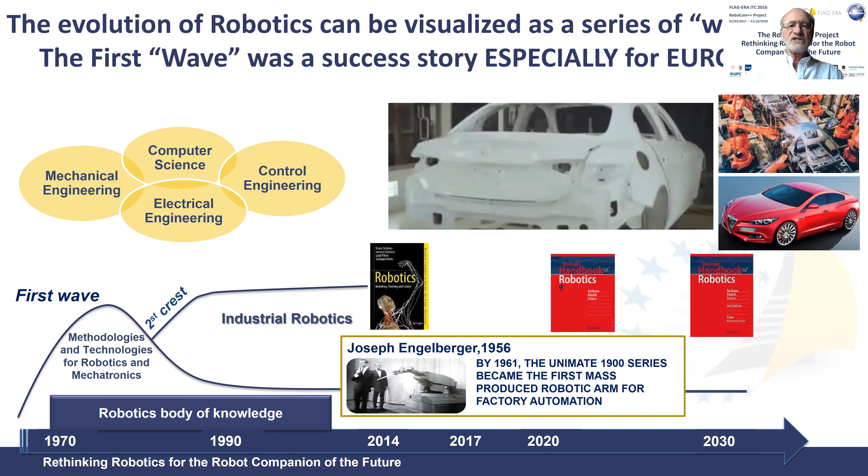The second wave of robotics was about what you can call the consolidation of industrial robotics, but also the rise of service robotics. New ideas, new technologies, for example advanced mechatronic solutions, the Internet of Things, and software, so artificial intelligence, machine learning, were introduced. Europe was a leader in this field, but of course there were also many competitors or colleagues who also developed this. And today this is a market that is quite well consolidated.

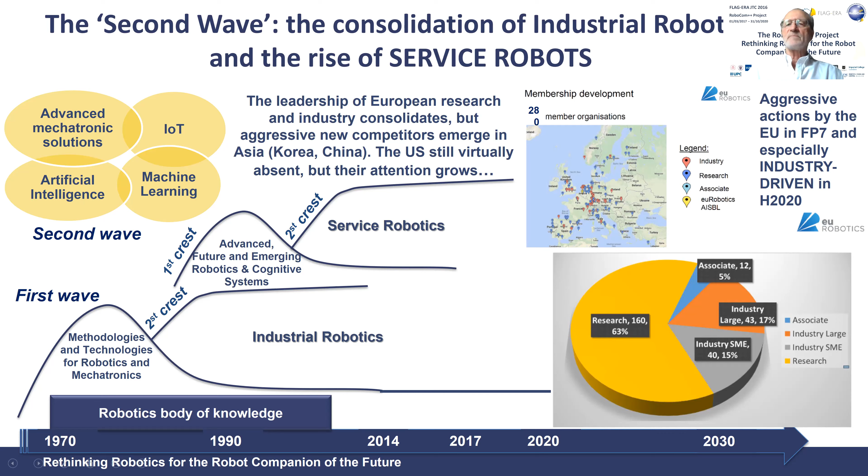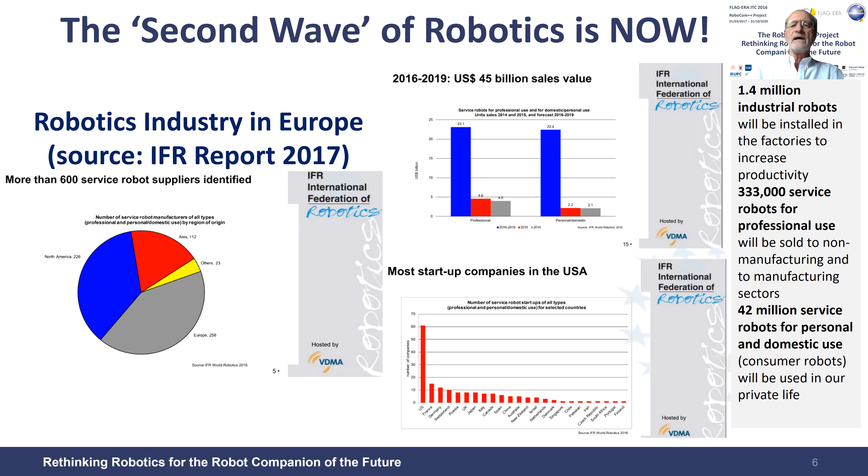In fact, if you look at these figures, it's quite impressive how service robots have established. I would just mention surgical robotics, but I could add vacuum cleaners and robots for extreme applications such as underwater or in space exploration. So this is also a very successful area now, and it is for robotics industry in Europe, but also in the USA, in China, Japan, Korea, and worldwide, and growing according to the forecast of the International Federation of Robotics. This field will explode in the near future too.

But there is something that goes after that, and it is very important to create the know-how, the knowledge that would allow robotics to explore and to fully take advantage of what will be the future scenario for what we call the third wave, that will be based on new knowledge, not only the mechatronic platform, but for example topics like morphological computation, the idea of simplification, self-organization, more and more energy issues, bionics and bioinspiration, the explosion of new materials, cognitive science, and of course the total connection to the web.

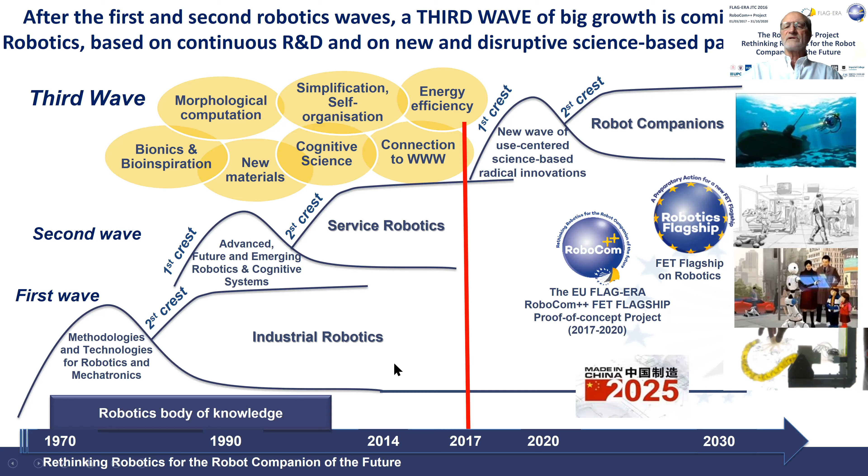And there are many projects that have been developed on robot companions and essentially on science-based radical innovations, involving big initiatives like, for example in Europe, Flagship, but in China also the 2025 program, and so on.

And you can also consider, in the framework of the idea of science-based robotics, the very successful initiative, the new journal Science Robotics, that has got a major impact factor very quickly, showing that robotics for science, or science for robotics, is a very solid statement.

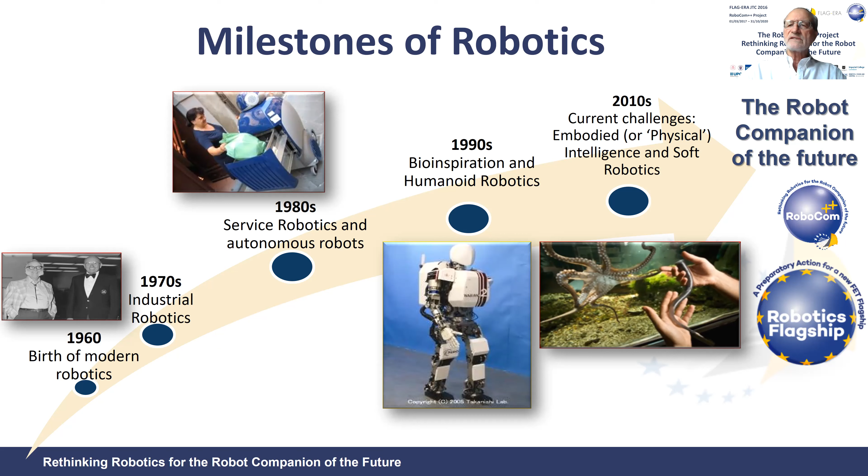So the milestones of robotics are shown here, very synthetically. Overall, we start from the birth of modern robotics in the 1960s, to the growth of industrial robotics, to service robotics and autonomous robots, to bio-inspired humanoid robotics, to current challenges like embodied intelligence. So not only artificial intelligence, let's say in the brain, but also intelligence in the body. All leading toward the concept of robots for all, robots that will be our companions in the future.

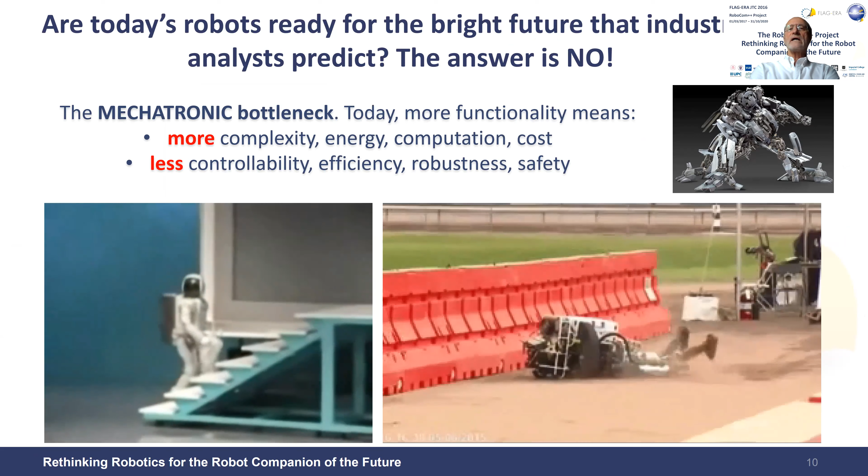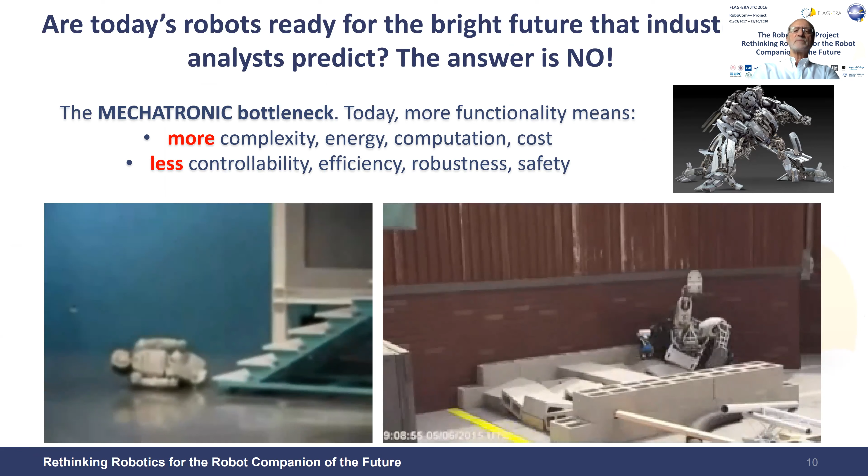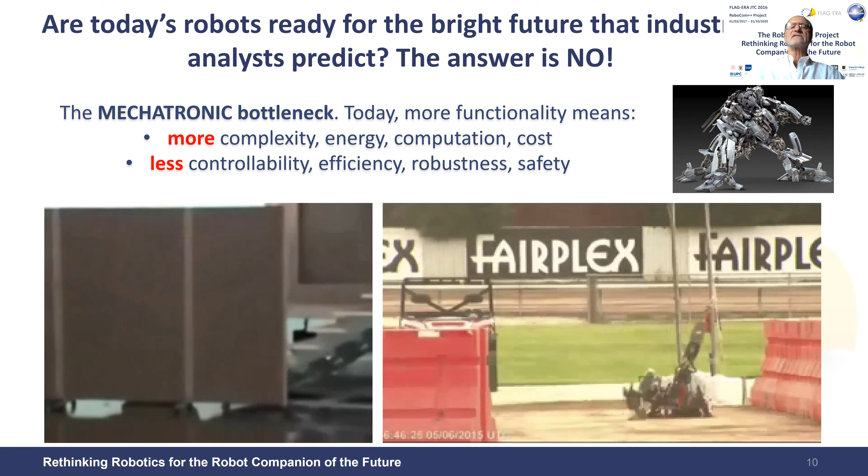Are today's robots ready for this future? And the answer is no. Those are, for example, very friendly demonstrations of the limitations of our current robots, because if we want to achieve more complexity, essentially we are going to have less controllability, less efficiency, less robustness, and ultimately lower safety.

So it's important to do something radical. This is our idea: of course mechatronic platforms will develop smoothly, but we want to explore and to go beyond the frontiers of the current incremental mechatronic approach. So, for example, looking at a cat, it's impressive how just a simple cat can have behavior that I define as graceful behavior, that is by far really beyond our capability.

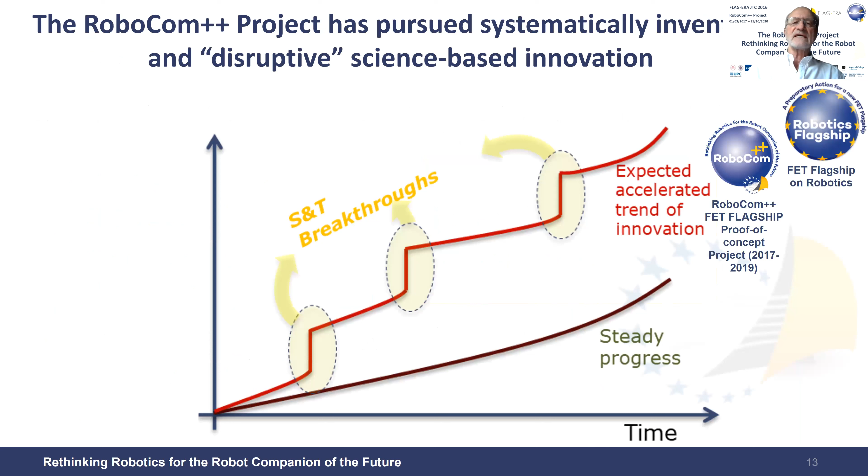So the idea to follow the third wave of robotics is really studying natural organisms and what they can do - simplification mechanisms, not complexity, but rather simplification, the use of new materials, new fabrication technologies, the exploitation of new energy forms - is what we want to pursue. And this is exactly what the Flagship RoboCom++ project was aiming at. The scientific and technological challenges and objectives were very ambitious, and I just wish to share with you the strategy.

The strategy is this: of course we have here an incremental progress of any technology. We can talk about robotics technology as a steady progress, and certainly we want to do that. But at the same time, we would like to take advantage of what could be breakthroughs, disruptive innovation that make quantum leaps in scientific and technology advancement. This could lead to an acceleration in innovation.

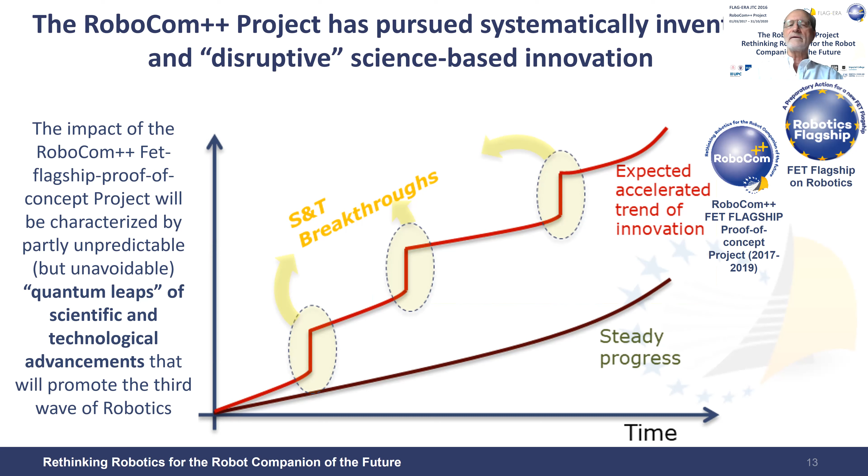How to do that, of course, is not easy, but the idea is to identify what could be the breakthroughs and to facilitate the implementation of such radical innovation by creating a favorable ecosystem in robotics research and also industrial development.

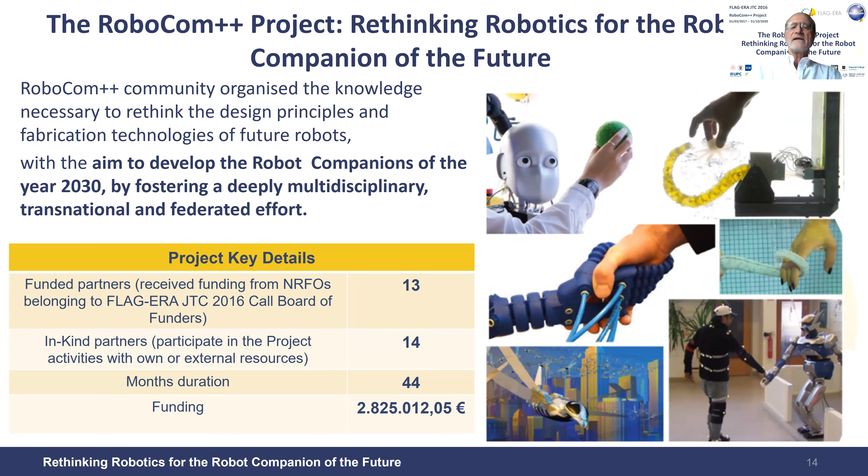Based on this vision, the RoboCom project was organized and funded by the Flagship initiatives and co-funded by participating countries. There are a total of 27 partners with funding in the range of 3 million euros. I think it's a beautiful example of what Europe can do in this framework. Actually, if you look at it, it's really unique in the world.

There are partners from virtually all over Europe and also from Turkey, Israel, and Switzerland. So strictly speaking, not all countries belong to the European Union, but they participate together as a consortium to pursue the vision and achieve the results I have outlined, because only a variety and diversity of knowledge and culture can lead to this ambitious goal. It is very difficult for a single country to do that, because this is a deeply interdisciplinary, and in fact transdisciplinary, effort. So what are the ambitious objectives of the RoboCom project?

The goal is to explore different aspects, not all of them because of the limitations of funding and time, but to explore the frontier of the robot of the future that will be able to effectively negotiate natural environments, better interact with human beings, and provide services and support in a variety of real-world and real-life activities, ultimately leading to a new wave of economic growth in Europe, and globally, by boosting the deployment of ubiquitous robots and web-based robotics services.

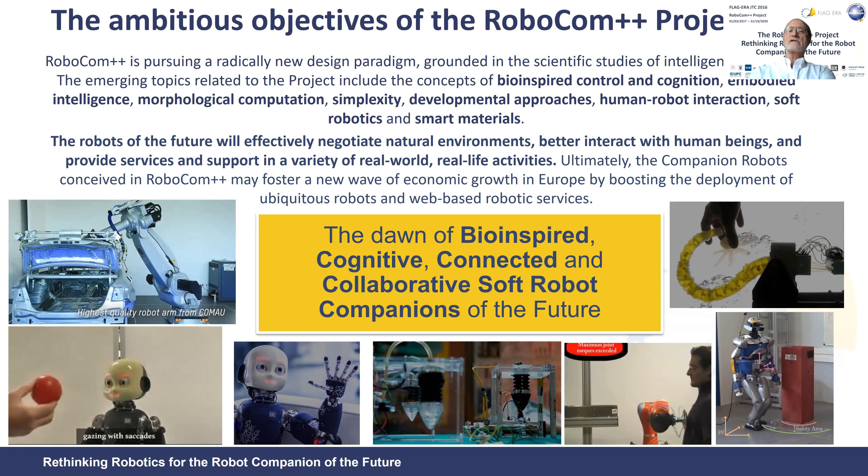To do that, we have explored and encouraged the dawn of bio-inspired, cognitive, connected, and collaborative soft robot companions of the future. The unified vision is shown here. We really want to work on science-grounded robotics to investigate, shown in yellow, the main representative objectives in Robot Companion, developing new engineering and new science, and deploying applications like a worker companion, a robot housekeeper, and a robot rescuer.

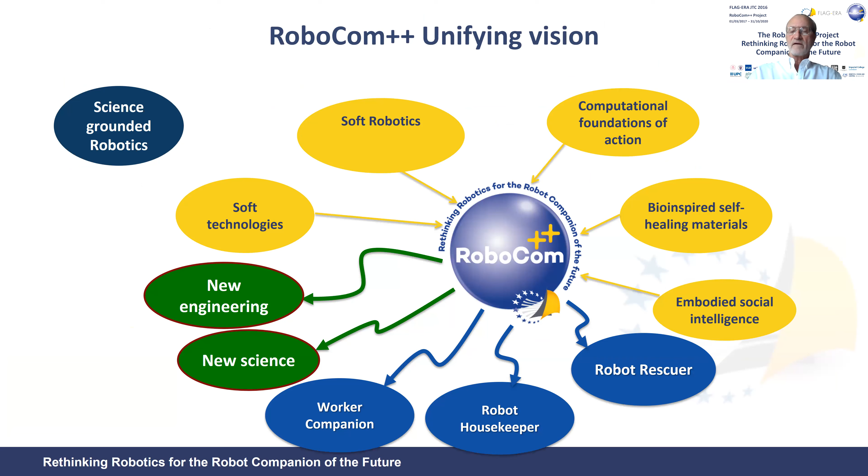We organized 47 community members who participated directly and indirectly in 7 working groups, with the goal of defining the roadmap for a future global interdisciplinary research program on robotics, but also enlarging the community beyond the border of robotics—for example, into biology, neuroscience, material science, energy, social science, and all engineering aspects. Those are just a few examples of the working groups.

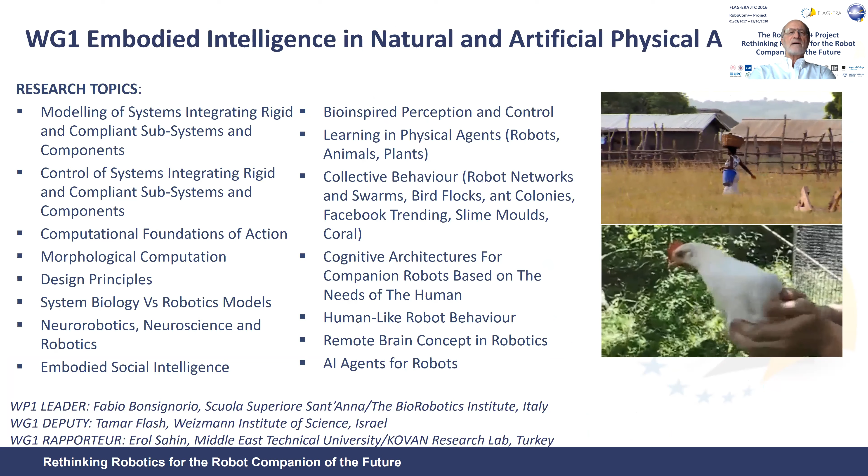The first working group is about embodied intelligence in natural and artificial physical agents. We have identified a number of research topics ranging from computational foundations of action to cognitive architecture, to AI agents for robots, and many other research topics shown here.

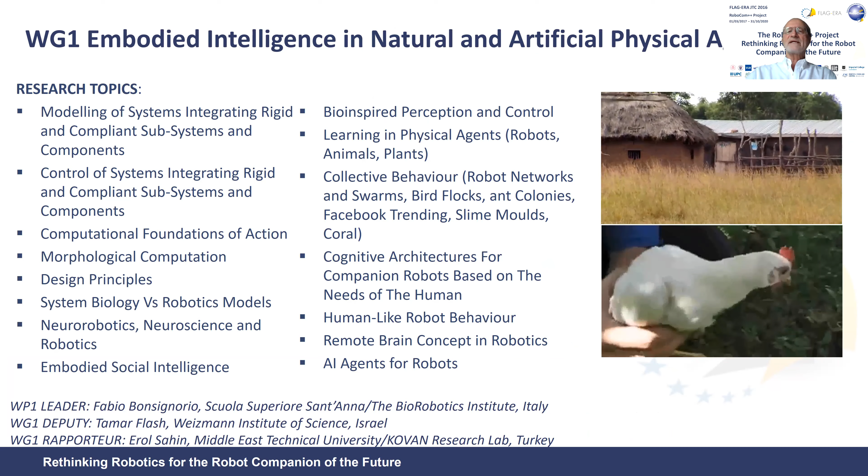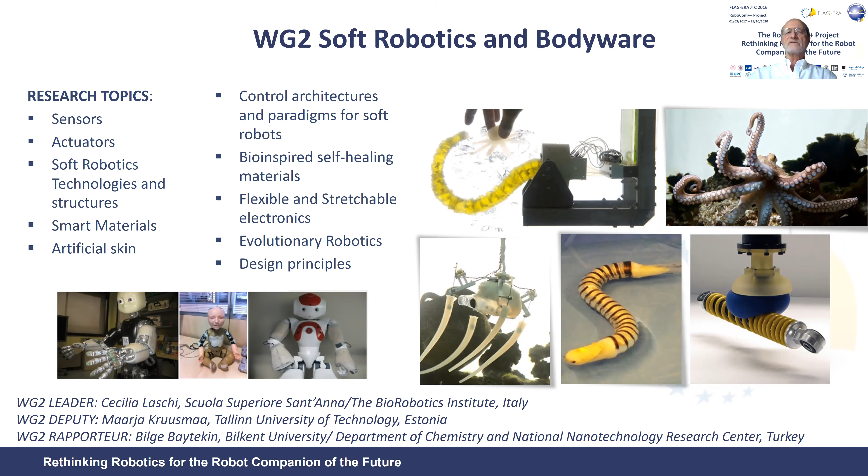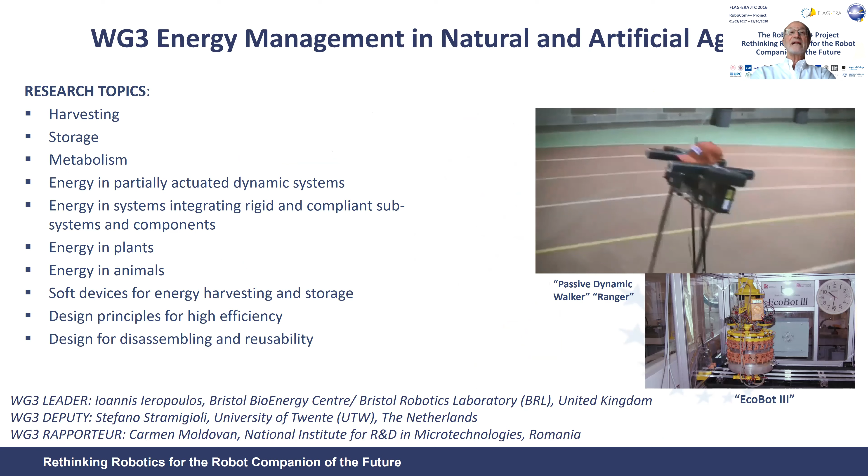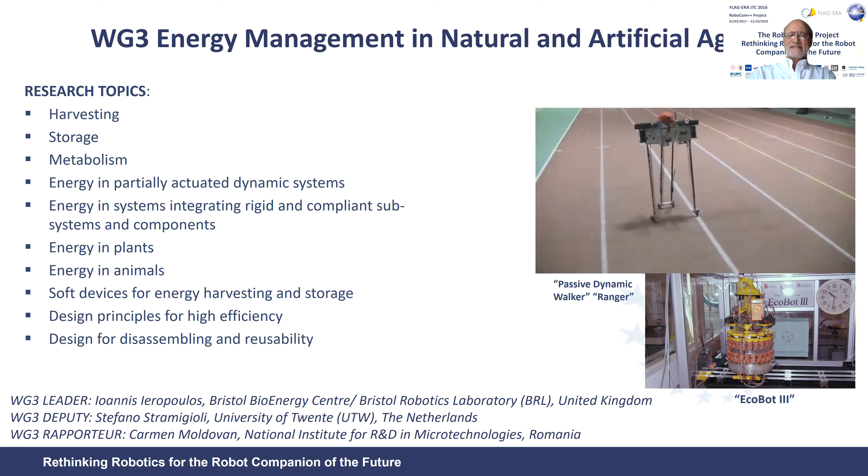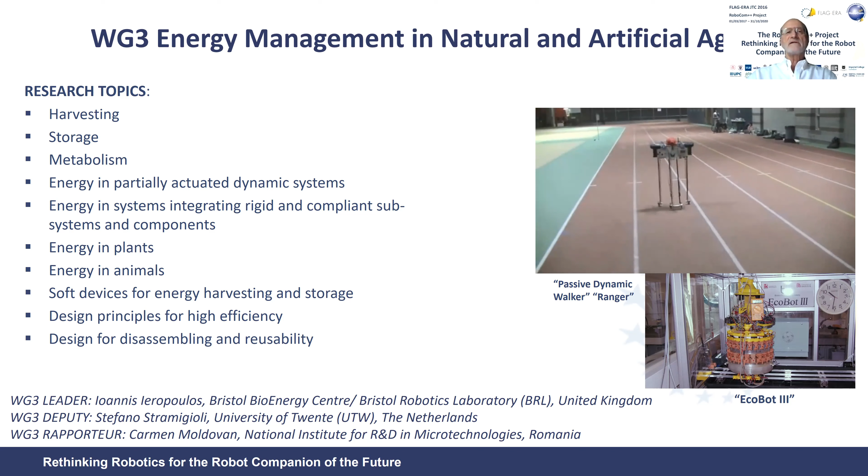A key issue was energy management in natural and artificial agents. This is really important and underestimated, in fact underinvestigated by current robotics. It's a sort of niche topic, but it's becoming very crucial in a more and more energy-concerned world. Harvesting energy, storage, metabolism, design principles for high efficiency, and design for disassembling and reusability are among the topics for this working group.

Another working group was about embodied cooperative and communication processes. The topics we investigated include communication, human-robot interaction, haptic feedback, shared control, collective behaviors, and topics like that—and then the impact on robotic system technology.

What could be the applications of this new knowledge—for example, in wearable robots, prosthetics, medical robots, but literally everywhere, including marine robots, space robots, humanoid robots, aerial and flying robots, cloud robotics, and so on.

Last but not least is the ethical, legal, societal, and economic issues. This is crucial for true acceptability and deployment. The research topics include society, economy, ethics, equal opportunities, education, and sustainability. Taking care of these topics is a fundamental contribution that European culture and European researchers can bring to robotics worldwide, and we want to do that.

Working group 7 is about science platform tools, because the overarching idea of RoboCom++ is about openness.

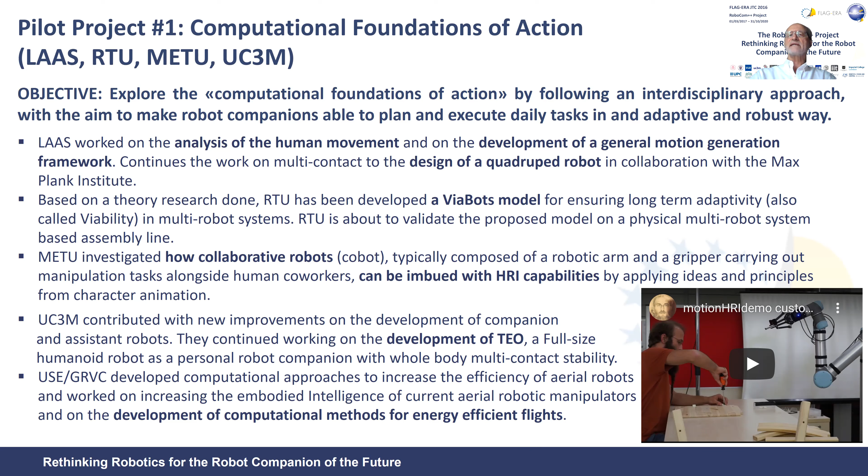Based on these work groups, we have implemented a number of activities and achieved some significant results. For example, pilot project one was implemented about the computational foundations of actions. This will be described by my colleagues in the following videos, but it's about exploring the computational foundations of actions by following an interdisciplinary approach, with the aim to make robot companions able to plan and execute daily tasks in an adaptive and robust way.

Another pilot project is about evolutionary approaches for soft robots exploiting morphological computation. The idea is to demonstrate that computational processes inspired by natural evolution can be used to design effective and adaptive robot bodies and brains for complex tasks and environments.

One important tool to do that was using innovative technologies for building the robot bodies, like 3D printing, but also 4D printing, in which the printed structure can evolve as a function of time and exhibit intelligent behavior due to the interaction between stimulus and smart materials.

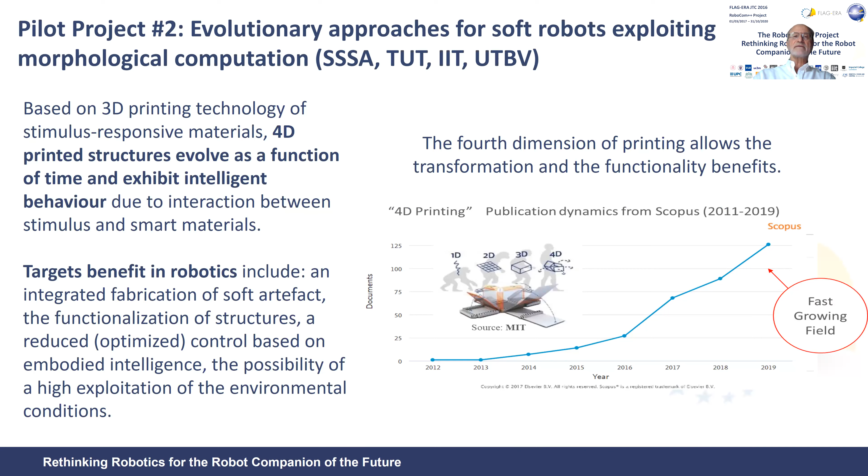Or also the approach of, for example, developing different configurations, like plant-inspired robots, and of course animal-inspired robots, making use of new technology like conformable electronics. For example, ultra-thin substrates, ink printable materials, physical or chemical or initiated chemical vapor deposition, dry transfer, water transfer, tattoo transfer.

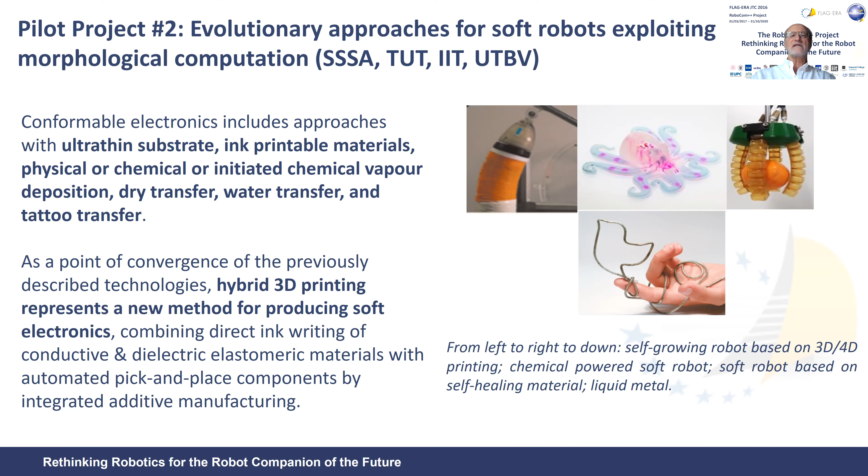So really innovative technologies. Another pilot project was about wearable and mobile robots. Here again the goal was to demonstrate the suitability of soft compliant technologies in two different ways relevant for the robot companion: modeling, simulation, and testing of body movement with haptic feedback, but also human subject experiments to build an empirical dynamic torso model of the user.

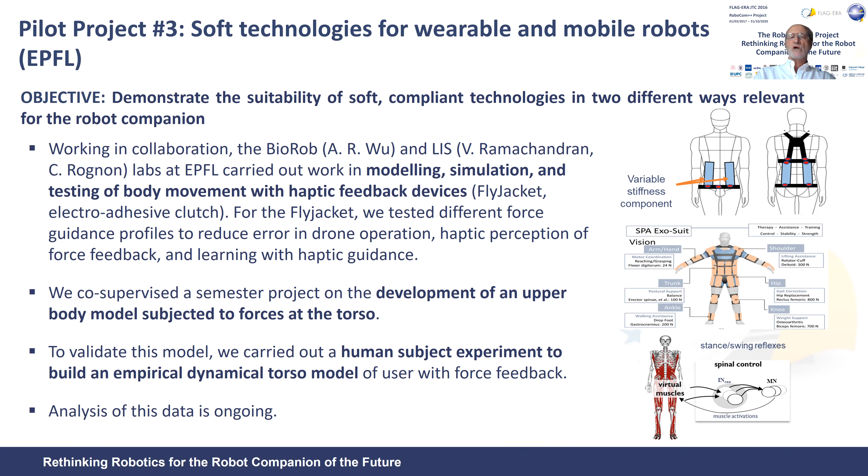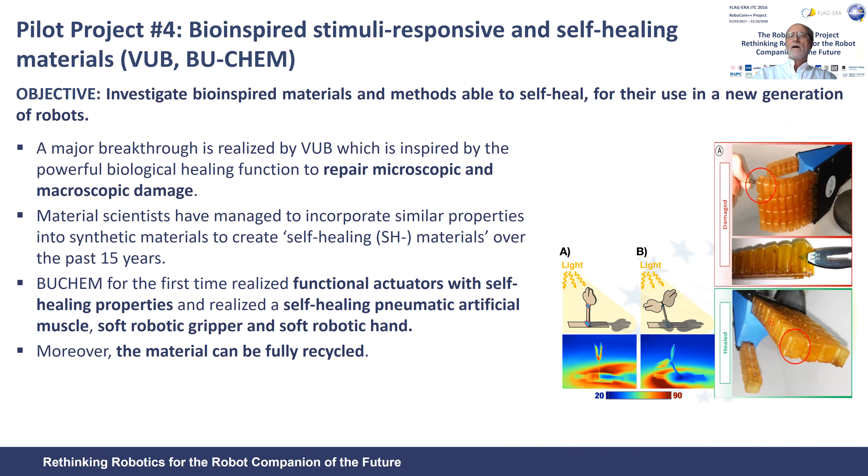But this will be described again in more detail. Or again, bio-inspired materials and methods for self-healing, developed in a new generation of robots. So you can really perceive the importance of body technology that was emphasized during the project.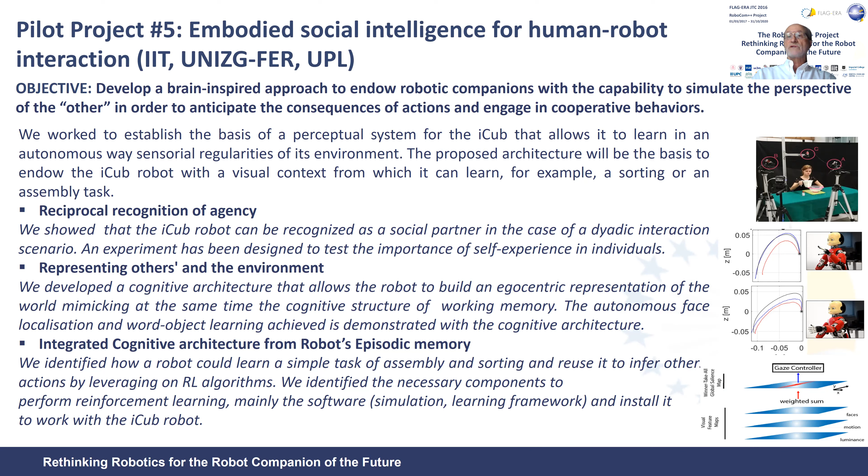Another pilot project was about embodied social intelligence for human-robot interaction. Here it's more related to intelligence - for example, reciprocal recognition of agency, representing others and the environment, integrated cognitive architecture from robot's episodic memory. This is important also for cognitive knowledge, in order to make robots able to interact with humans.

In conclusion, in this effort we have produced a number of publications, many of them involving a single project partner, others involving several project partners, and also produced some patents and some spin-offs.

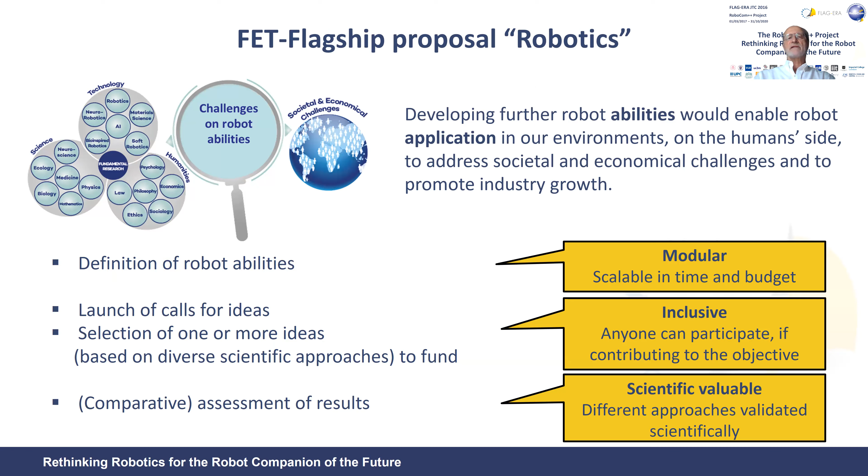The ultimate concrete goal of RoboCom++, in addition to generating new knowledge and new technology, was about proposing a big initiative that was part of the FET-Flagship call that the European Union has launched. Professor Sandini, who was the coordinator of this initiative, is showing to you how this was organized. But essentially it was a major initiative with almost 900 participants, 465 institutions, and a lot of endorsement worldwide. It was really a huge initiative addressing problems related not only to technology, but also economics and social science.

Unfortunately the project at the end, even if it was evaluated really at the top of the ranking, was not funded. We will continue, we will try in the future to involve many colleagues in Europe and worldwide.

As we did, for example, by presenting the RoboCom++ concept and initiative at international conferences like RO-MAN 2017 held in Lisbon, Portugal, or through participation and contribution to the European Robotic Forum in 2018. We are talking about events with 700, 800 participants from all over Europe.